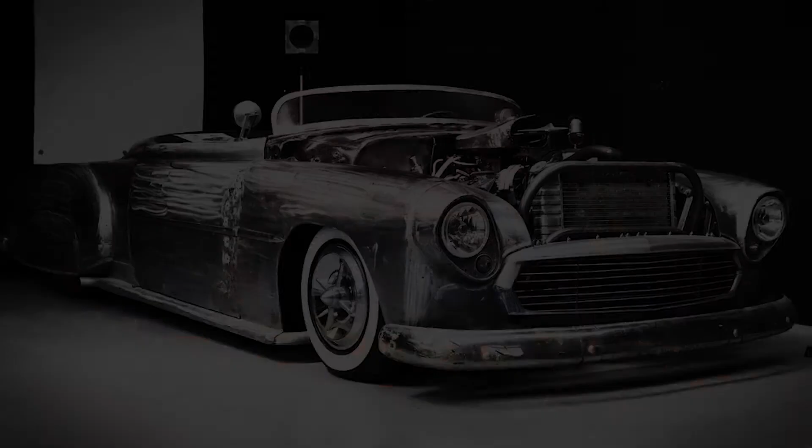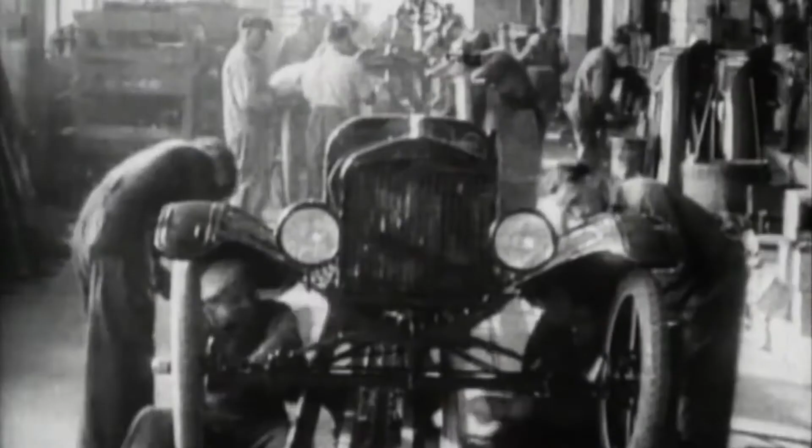Beyond just cool, the automobile has been a cornerstone of man's ingenuity, mythology, and fascination. It magically captures the ideals of freedom and inventiveness that drove us straight into and through a remarkable industrial age. The birth of assembly lines, mass manufacturing, and the Model T Ford put a blank canvas in the driveways of everyday America.

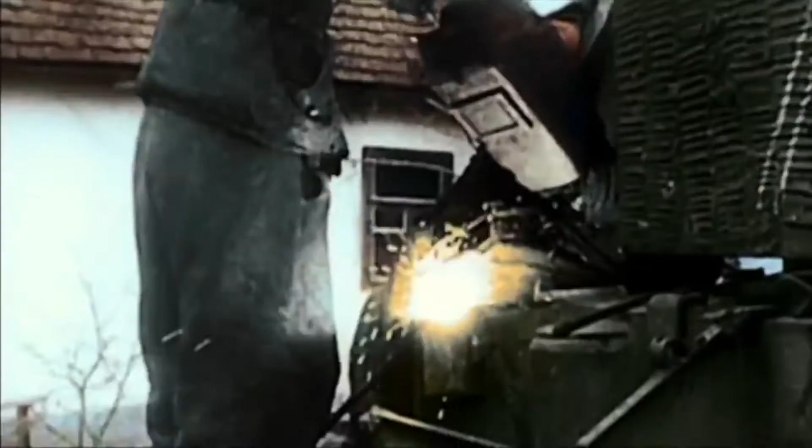At the end of World War II, a generation of Americans returned home with a taste of danger and excitement, along with newfound skills forged by operations of the industrial war machine. Everyday life seemed to run at half speed to these young men and women. They had the power to change this.

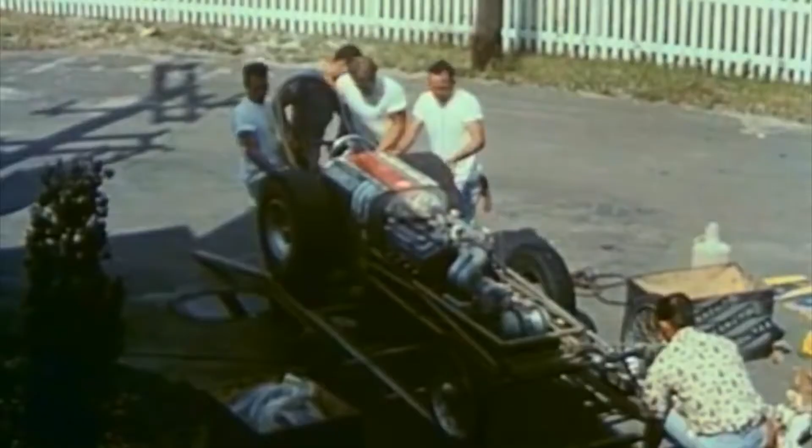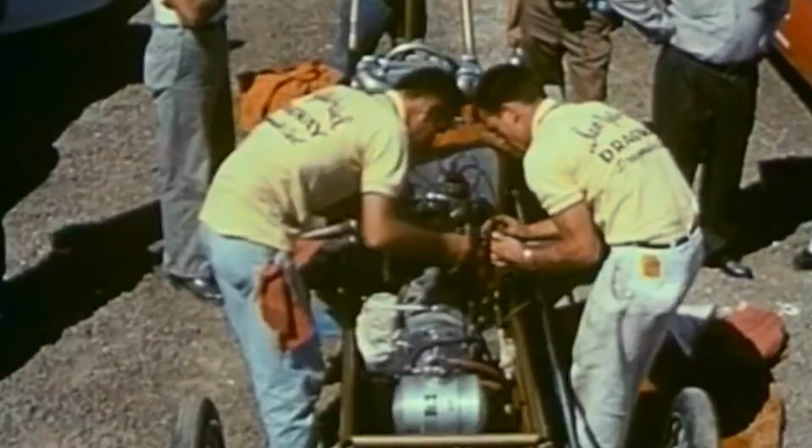Regular cars could be stripped down to the bare essentials. Using the mechanical skills learned during the war, motors could be hopped up to deliver high performance to these lighter frames. Soon, all across America, these backyard innovators were redesigning and modifying 30 years of mass-manufactured metal to produce lightweight, stripped-down, and incredibly fast cars. Each creation was an individual expression of form follows function and aggressive performance ideals.

Now let's move on and join the real speed boys of the desert. At El Mirage Dry Lake, those hopped-up cars may look like a familiar old jalopy, but their innards have been streamlined and given a shot of motorized adrenaline. A hot rod was born.

Hot rodders were the original vehicle hackers. They rescued the automobile from racing into a dull future of generic mass production anonymity by embracing deep customization and radical creativity. They drove what they wanted because they made what they wanted, and they drove fast. What started out as an unruly and dangerous form of racing on the dry lake beds of Southern California rapidly became a highly organized sport of drag racing.

Standard lap with top elapsed time on our Chrondek clocks, a 9.12. These weekend warriors worked to give their cars any advantage possible over the competition. It was never enough for the average teenage gearhead to simply be fastest. He needed to be coolest.

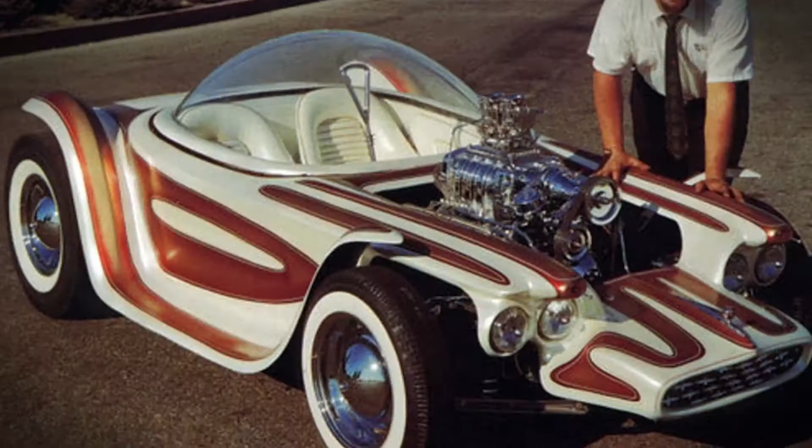Modifications like the chop top, big and little wheel and tire combos, and stripped down, smoothed out aerodynamic bodywork became de rigueur across America, as young people created their idea of what was cool, with easily accessible raw materials discarded in the junk piles of a rapidly industrialized nation. These mechanical innovators became leading lights in mainstream American motorsports.

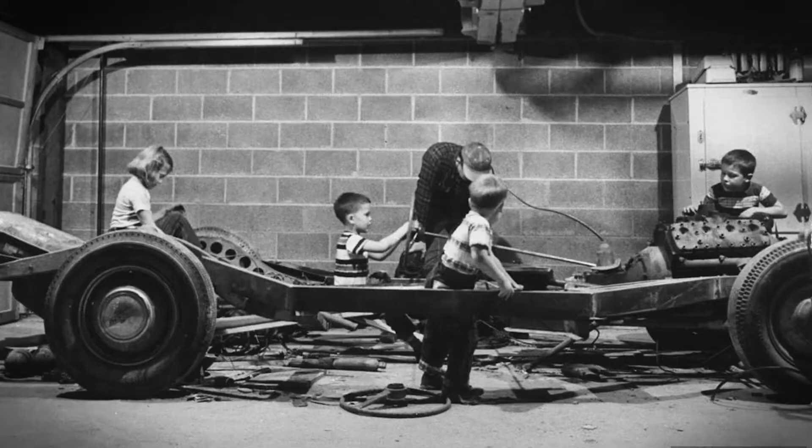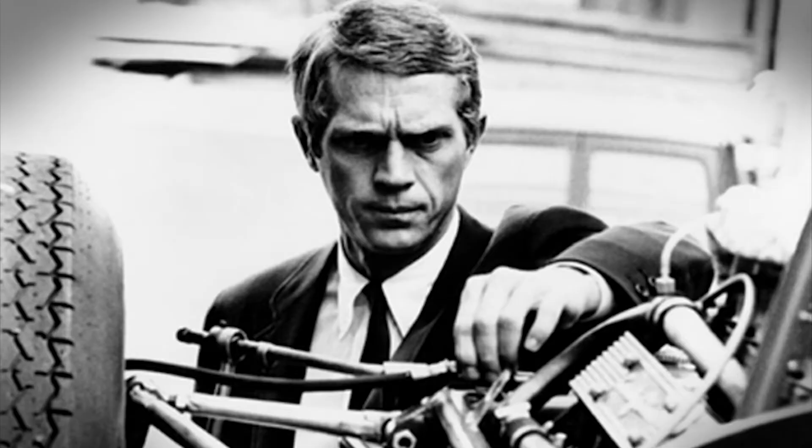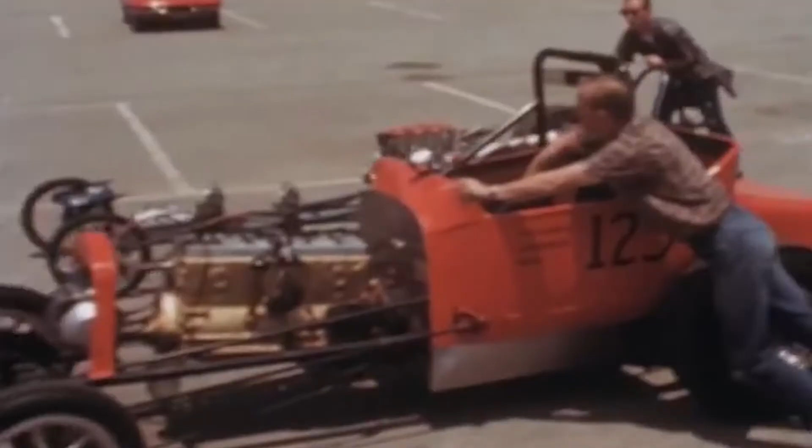It wasn't long before the major motor manufacturers were mining this ever-evolving youth culture for ideas and pedaling furiously to keep up with the visual language of the hot rod vernacular. 'Hey, you got a bitchin' car.' 'Yeah, I know.' Somewhere in a place where self-taught mechanics collided with beat culture, the coolest cars on the planet were created in the garages of innovators and makers, changing the car industry forever.

So I play that because it forms a major part of my history, but it also forms the basic ethos of the company that we formed in the US.

Now, I was a lad growing up in the 70s in Newcastle upon Tyne. Somehow I became fascinated with hot rods. I have no idea where it came from, but I spent that childhood playing with Hot Wheels cars rather than Matchbox cars. So imagine my surprise when 25 years later, I found myself as head of design for Hot Wheels.

In 2009, I was tasked with rebuilding the brand that had been around since 1968 and bring it to life in a way that we could make more than a toy brand from Hot Wheels. We wanted to build a lifestyle brand.

This image was the inspiration we came up with to turn what was just toy cars into a whole global automotive lifestyle brand. The guy I got on the phone to help me do that was a guy called Mouse McCoy. He was a Baja 1000 motorcycle champion, turned stuntman, turned movie director. He had a reputation for innovative filmmaking and action.

Between the two of us, we came up with a Hot Wheels for Real campaign. The campaign required us to build a lot of stuff very, very quickly, and it had to work, as you'll see.

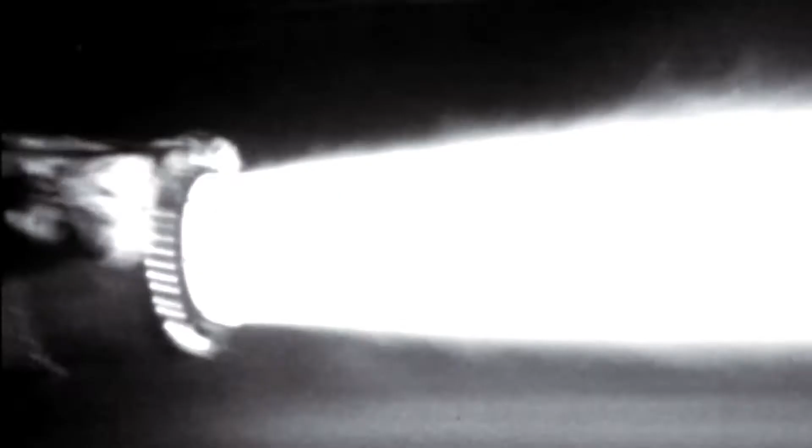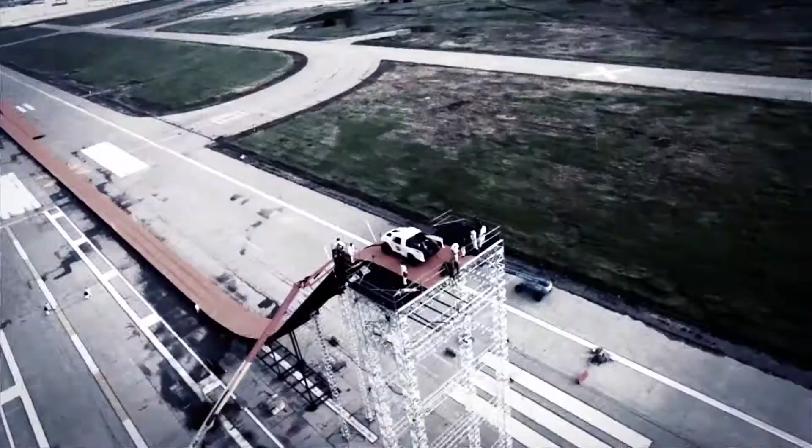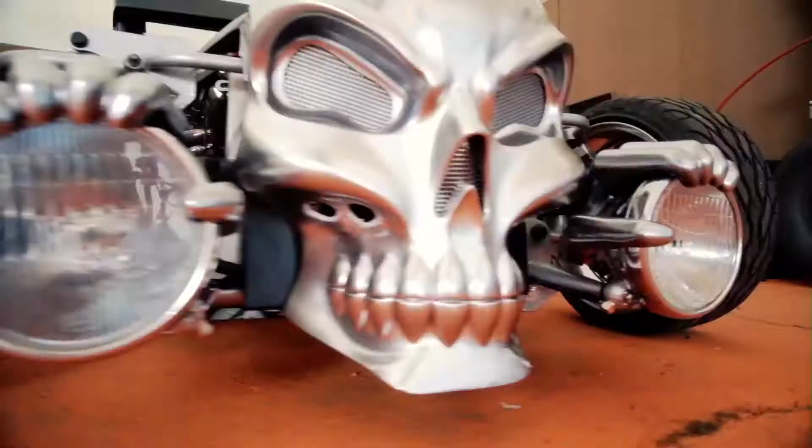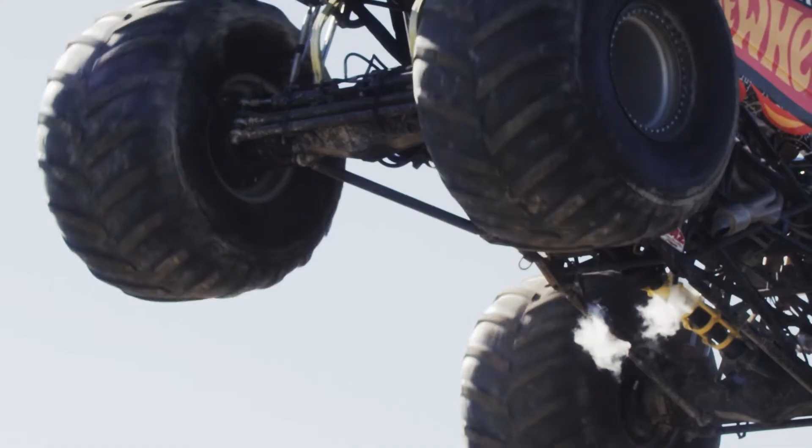For 43 years, this place has been secret. When you come to this facility, this is the cutting edge. We hold back nothing. The beginning of a whole new era. It's a kid's dream for all of us come to life. It's man's ingenuity on a grand scale. That's the orange track right there. The tires aren't gripping. I'm losing traction. Team Hot Wheels. In public for the first time ever. There have been stories and rumors in the test facility. It's time to set the record straight. I wouldn't believe what I was doing out here. Unconscious. Got it. Still no sign of movement in the cockpit. Guess there's nothing you can't do with a set of Hot Wheels.

So yes, I'm very proud of that, which is why I still show it. It's really just a good way to start a presentation. But the reality of it was, it formed a new idea in our heads. The Hot Wheels test facility was a mythical place where anything a child could imagine would come to life. And that was a very interesting idea to us.

Through 4 years of doing that, we realized we were using very old technology. We were really pushing the limits of how fast we could work with tried and trusted methodologies, and we were beginning to see the world of digital design and manufacturing changing.

A couple of years later, I decided to leave Mattel to look for something new, and Mouse was working on a project inspired by this that he called Autonomy. Autonomy was his next big movie, and his vision was the biggest car movie in the world that talks about the coming problem when driving is outlawed and autonomous cars take over.

If you're like me and Mouse, we like to drive cars. We know autonomous cars have a place, but we're fascinated by the notion of what happens to all those people who live to ride motorcycles, or perhaps live in the countryside, or perhaps they just love driving, and the conflict between autonomous vehicles and hot rods and sports cars and motorcycles leads to some pretty big problems.

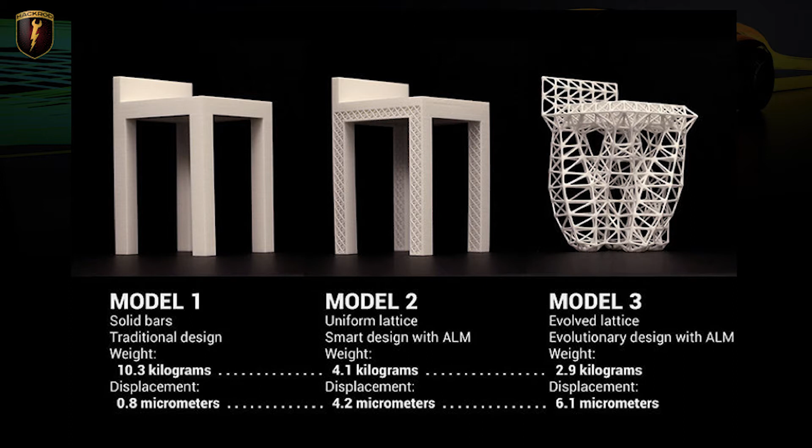When I saw not only the optimization that generative design can give you when you try to build a structure and optimize for lightweight or strength or whatever you want, I also saw a new aesthetic. This is going back about 3.5 years ago now.

Mouse and I looked at each other and went, dude, can you imagine what it would look like if we built a car chassis like that? So suddenly, our quest for movie research took on a more immediate world, and we found ourselves slipping into design and manufacturing, researching the reality of where that world's going to go.

Now, if you're making a movie, you've got to have a star. So Mouse and I designed the car that we wanted. We were like, if we're going to do this, let's design the car that we know we can't have. So I'd like to introduce La Bandita.

It's a car that wears its heritage on its sleeve, but is going to be built with the very latest technologies. We were inspired by vintage Porsches and vintage Ferraris from the 50s, where they're amongst the most beautiful cars ever made, and I don't think anybody would dispute that.

But really, when you look at them, they're just a metal upside-down bathtub with a big engine and some crude suspension. They're very simple, made for one thing: driving fast and dealing with the harsh realities of a road race like La Carrera Panamericana or Mille Miglia.

So we set out our stall and started the design. Using tools like Fusion, Autodesk's core new digital design platform, we realized that we could very quickly go from a rough sketch to a fairly complex body form.

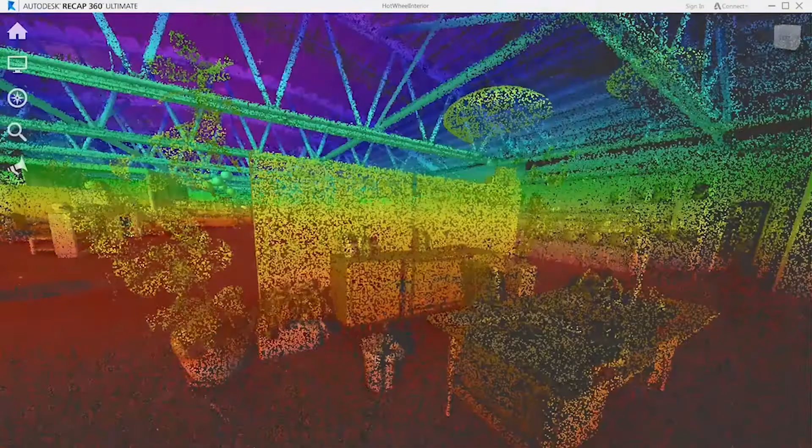So we looked at the world of reality capture, and we began with a chassis we already had that we knew was a good chassis. For the Hot Wheels project, we developed a lightweight sports car chassis with some off-road engineers, and these guys we referred to as the wizards of chromoly.

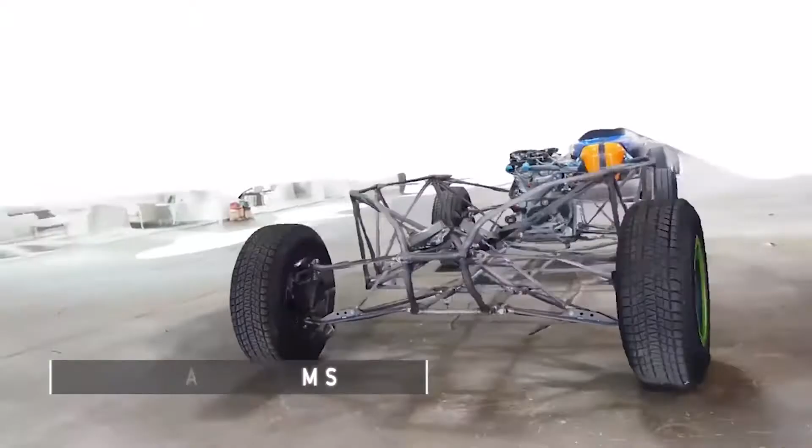They were the guys who could just chalk out a chassis design on the floor and fabricate it. And we knew this worked because some of the best drivers in the world had driven this car up a mountain and came back saying, that was the most fun I've had in years.

So we knew this structure was good enough, so we scanned the structure, captured all the hard points for suspension and engine mounts. We sensored that car up, we put Mouse in the driving seat - there was no slouch behind the wheel.

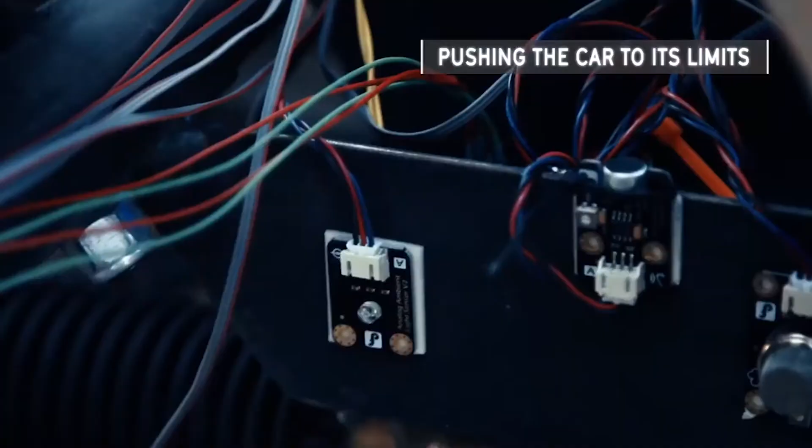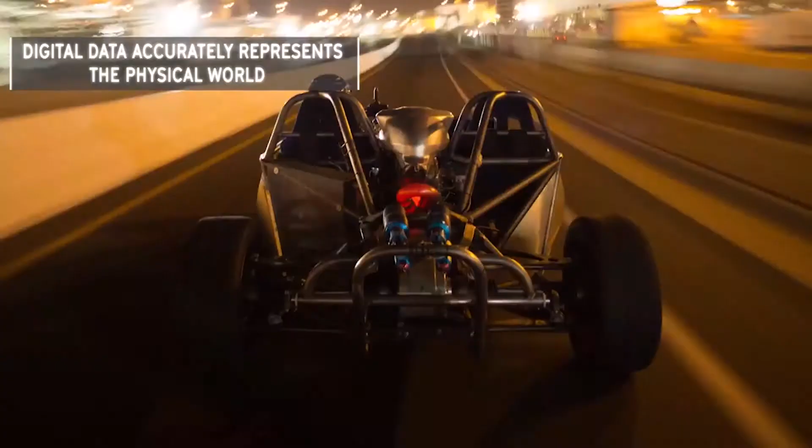He took it out into the desert and absolutely thrashed it. Now, we weren't ever going to drive this car like this once we finished it. We're not designing an off-road car, but we figured that if we can make it survive the rigors of driving in the desert like this and capture all the data with a simple loom, we partnered with National Instruments and built a simple sensing loom for all of the key stress points in the chassis. We knew that we would have captured, not only with the reality capture side of things, the geometry that makes it work, but also all of the forces that the car went through when it was being absolutely thrashed to the limit.

We had some fun closing some streets down in Long Beach. It's the benefit of having a movie director as a business partner - you get to play with all sorts of big movie toys and feel like you're in Hollywood all the time.

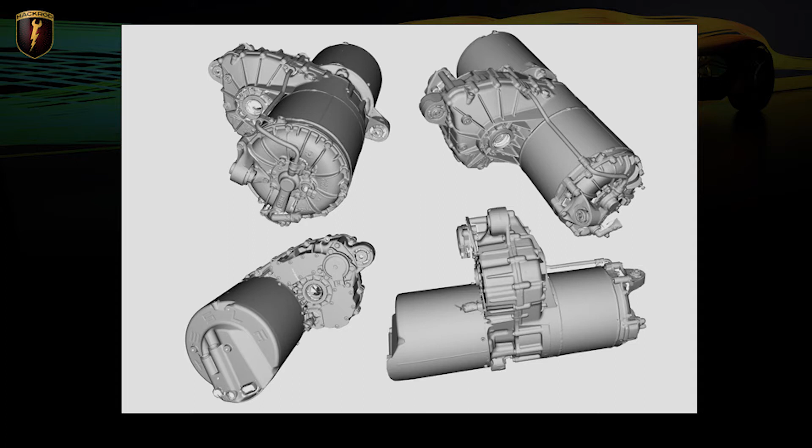We also scanned the mechanical components. We decided actually that we were going to make this car fit for the 21st century, and so we looked to Tesla for power. We decided that elegant 50s-looking sports car was actually going to be powered by Tesla. We didn't go to Tesla knocking on the door - we decided to put the hack in Hackrod into play, and we went to the junkyards of California, where, believe it or not, there are a lot of very cheap Teslas.

Now, Tesla is a really fantastic car, but it's still driven by humans. And when you put a very fast car in the hands of humans, you tend to find a lot of them in the junkyards. So we pulled the motor out of a Tesla, and we scanned that as the major mechanical component, and we fed all of this information into Dreamcatcher, and started on the process of generative design.

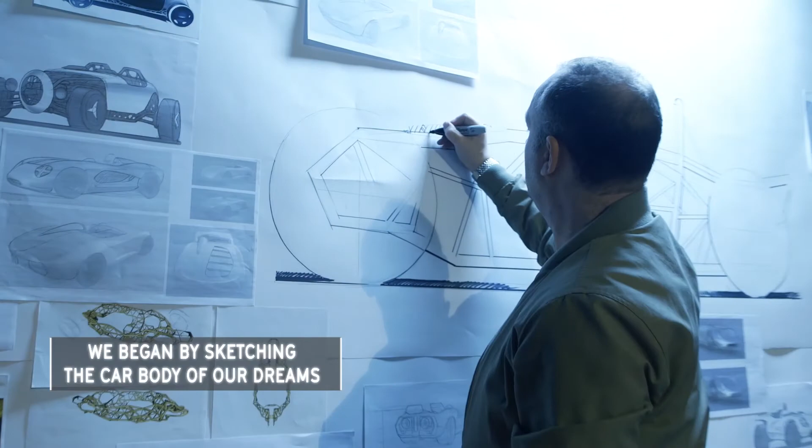Now, the way it works is this. You build a digital model, and you put in your mounting points that we'd scanned and captured from the original chassis. You put in your mechanical needs, your mechanical components. You put in voids where you don't want the chassis to grow. And what's left is the area of the car within the outer shell that you want to build your structure.

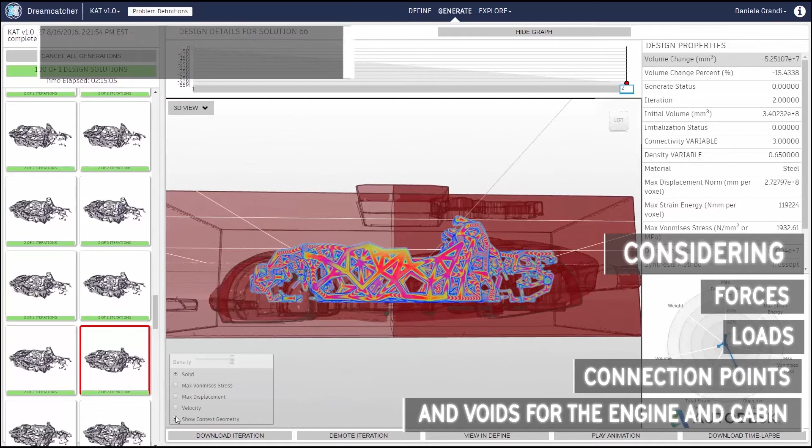The wonderful thing about Dreamcatcher is that it would give us hundreds of iterations - not just one solution, but you could flick through and move some parameters until you were happy with the way the car looked. We also pulled it into some analysis software where we could check for rigidity and any problems and do a little bit of digital proof. We also put some VR goggles on and started working on the car.

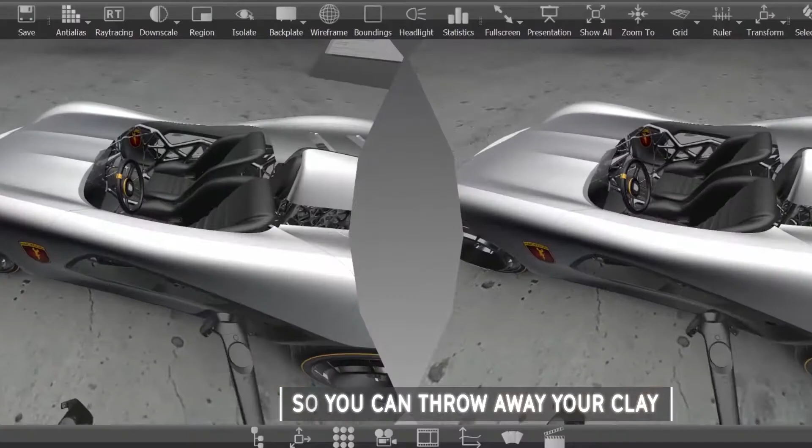This is obviously just a mock-up, but the next bit, we actually started looking at this car full size in VR. I actually fitted the engine to the transmission to the chassis 3 months before we started welding any steel. And 3 months later, once we finished the chassis and I put the motor in, it fit perfectly. So we were genuinely using VR to make key design decisions well upstream of where normally you would ever have the chance to view it in reality.

Now, this is where it gets interesting, because around this time, we realized there was no way we were going to 3D print a generative chassis full size for a car. We talked to all the right people, but it just appeared there was no way we were going to get there in time, and this was for Autodesk University last year.

So we took a step back, and we said, well, we're missing a point here, right? We're using all of this fantastic technology and all of this new world of cloud processing and digital power, but most people today, if they got this far, wouldn't be pressing print on like $1 million parts. Most people would probably just want to weld up a chassis.

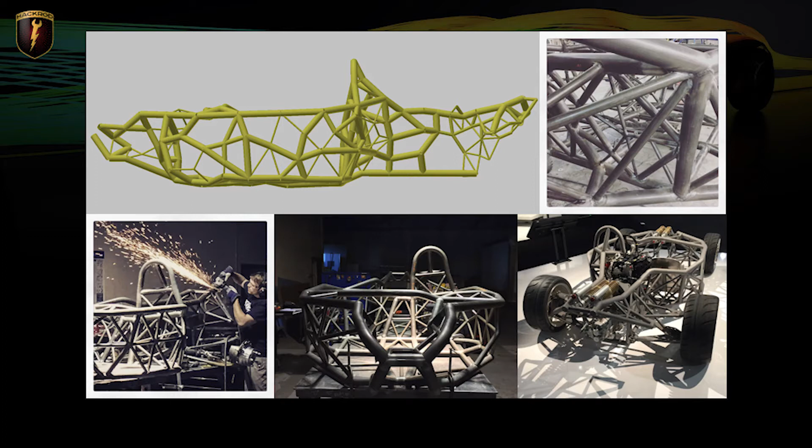So we ran another simulation with Dreamcatcher, and we specified the material as chromoly tubing. Chromoly tubing is what most off-road teams and NASCAR teams use to build their chassis. It's incredibly strong, it flexes well, and it's been the staple of American race car design for a long time. Now, we specified thin wall tubing, and we let Dreamcatcher do its job, and the model came back 30% lighter.

We had to figure out how you would actually fabricate a complex structure like that, and we partnered with some other companies in California. There's a company in Orange, California that has pioneered CNC tube bending, laser cutting, notching and serial numbers. So we ended up with a big jigsaw puzzle of tubing, literally 320 tubes laid out on the workshop floor, but they all clicked together like a kit.

So a week later, we'd fabricated a cutting-edge, generatively designed chromoly race car chassis, and when we cut it off the frame table and put it on the scales, sure enough, it was 30% lighter than the car we started with.

Now the next stage with this car, and this is where we're right now, is we've got to do some serious testing to prove out that it is as strong as the last car. But everybody who's looked at it, all the engineers, have said that not only does it theoretically look stiff enough and strong enough, but it's also a lot more rigid than the chassis we started with, because of the way the forces are now spread throughout the frame.

We think we've got a very, very rigid, 30% lighter chassis that also looks a hell of a lot better, because we got to play with the aesthetics. And if you notice on these photographs, it's completely asymmetric. At first we were like, why is it asymmetric?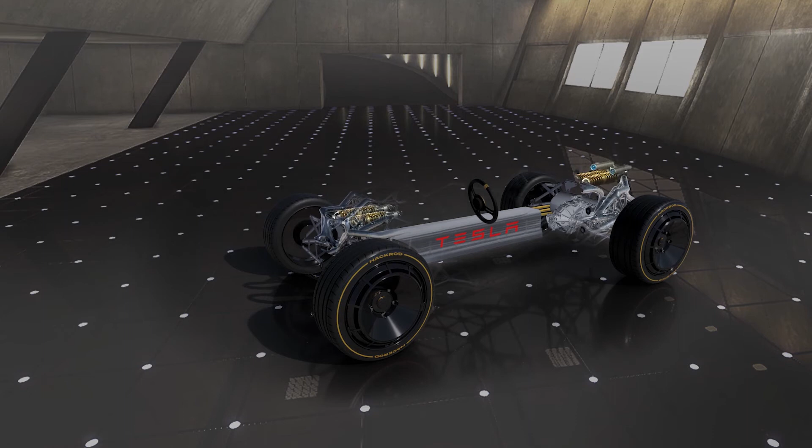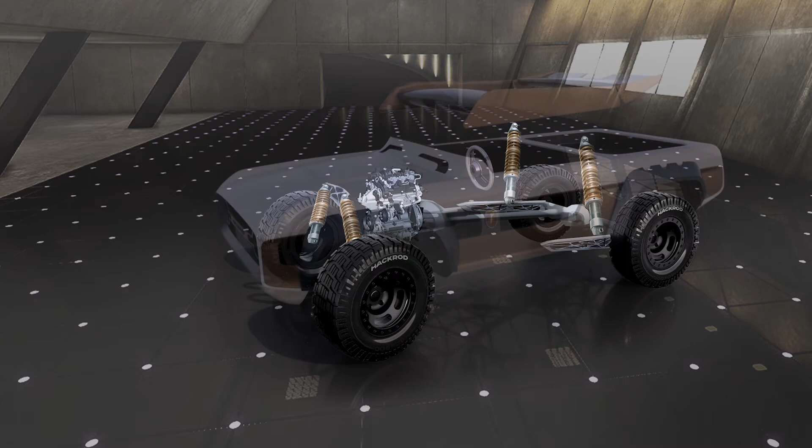The goal of the project is this: build a platform so you can drag and drop your components, choose your suspension, choose your drivetrain, choose your outer shell, and then generatively grow a chassis. And then if you decide you want to change your design, start with a different set of mechanical components, a different outer shell, and have artificial intelligence and generative design grow you a new structure that'll tie it all together. The missing point is we need a printer big enough to print a chassis, because a lot of these structures really are only suitable for additive manufacturing.

So we called Slade up and asked him to come and have a chat with us, and after we showed him our vision, he explained to us that he was getting frustrated with all the ideas in his head, that he couldn't move fast enough, and he decided to join Hackrod as our new CTO. I'm going to let Slade do some talking now, because he's a lot smarter than me, and I want you to hear from his own mouth his vision of the future.

I'm an expert in advanced manufacturing and materials. I've spent my career inventing materials and manufacturing processes for some of the most high-speed products on this planet and off of it. I was recruited by Lockheed Martin Aeronautics to work in the Skunk Works. I worked in a group that was specifically focused on advanced manufacturing concepts. We were called Project Lightspeed.

And we were going to change the paradigms of manufacturing. My project to enter that group was to study and determine how we were going to 3D print the next jet fighter with carbon nanotubes.

We're looking at a manufacturing future that's going to be very different. In the aerospace world, you have access to a lot of expensive but sophisticated and capable tools. Those tools are becoming more accessible. Those software packages, those imaging techniques, the analysis, even the manufacturing itself is becoming more accessible to other industries, to individuals even. And by taking those tools and offering them to more people, what we're doing is we're democratizing manufacturing.

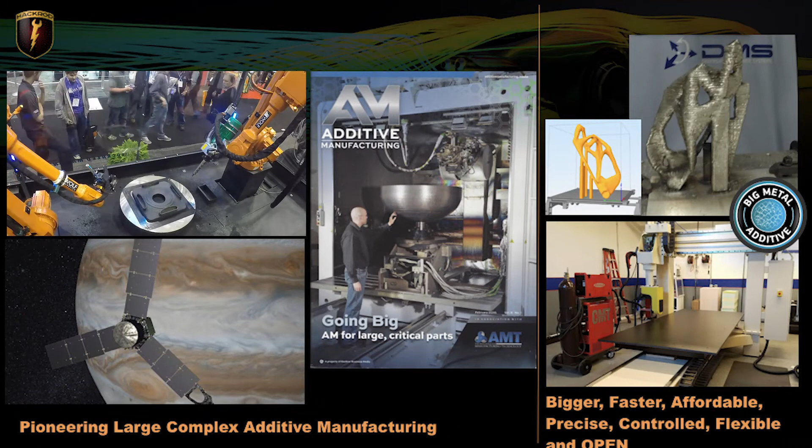Slade's history with Lockheed Martin started up there on the left, where he figured out how to print satellites around conventional propellant tanks. He actually pioneered the additive manufacturing at Lockheed Martin needed to print the Juno space probe, which is the probe that currently is orbiting Jupiter.

And then just before he left, he'd moved into an entirely different scale and had 3D printed, I think it was a 48-inch propellant tank, which was certified for use on the Orion space program. So the guy came to us knowing a thing or two about large-scale metal additive.

And he began to experiment with what he calls big metal additive. That's his DIY home project. And his goal was to produce a machine that could handle large-scale additive metal manufacturing, bring the cost down, improve the stability of the printed part, the dimensional stability, and also run a lot faster.

Now, the machine that he's developing - most large-scale print machines will lay down about half a pound to one pound per hour. Slade reckons he's going to be more in the 3 to 5 pounds per hour parameter.

The object you see at the top right is a generatively designed propellant tank bracket for use - it's a military marine application, and this is the first project we've run on the prototype machine, and it ran perfectly. And so we're now in the process of building a 20-foot print bed to print large-scale components such as car chassis. And I've got a little bit of footage to show you of this machine in action.

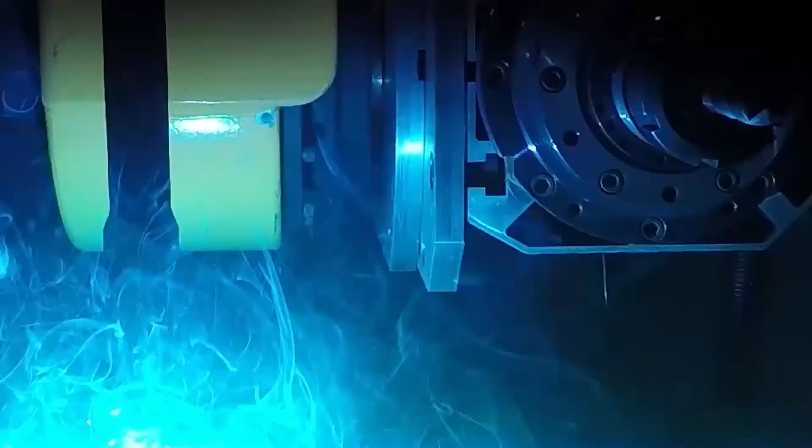And as you can see, we started with a generative part and then sliced it. It's actually a hybrid machine, and one of the things that we're finding is the way to maintain tolerance when you're using deposition printing is to have a second head on the machine, which is a mill.

And so we print a couple of layers and deck it, and print a couple of layers and deck it. And through that process, you get to maintain really good stability in a large metal part. And let the robot finish what it's doing.

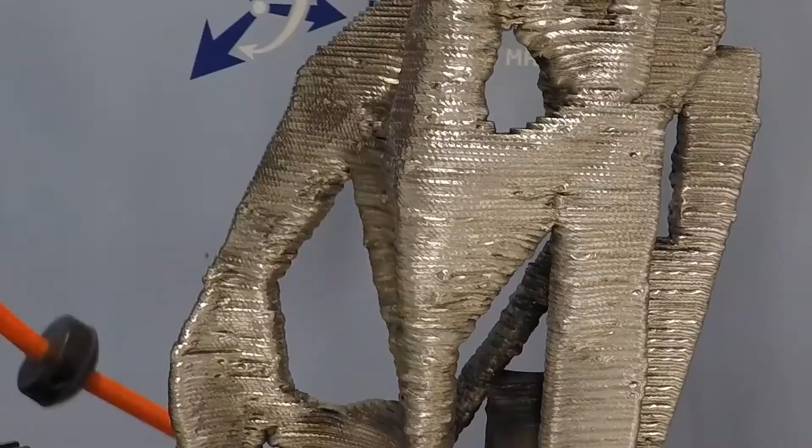Now, Slade was very happy with this bracket. He felt it met all the parameters he needed. And the really cool thing, what you don't see here, is the cutting head can then come and trim the support off. It can, before it does that, do some finish work. If there's any surfaces that must be milled to exact tolerances, that can be done on the machine.

The exciting thing is it now has a rewind button. So if the print screws up, which for years and years has been one of the big problems - anybody who's ever run a 3D printer knows that if your job goes bad, it's in the trash to start again. Well, we now have a rewind button to say, hang on a minute, that's not right. Trim it back to where we go. Let's correct the file, let's correct the machine, and keep going.

And the next phase for us really is to move on. Hopefully early new year, we should have a big bed ready and we can start printing our car chassis. Now, this is the final goal. We're hoping within the next 12 months this thing will be a reality, that we will have an aluminium 3D printed, generatively designed car chassis.

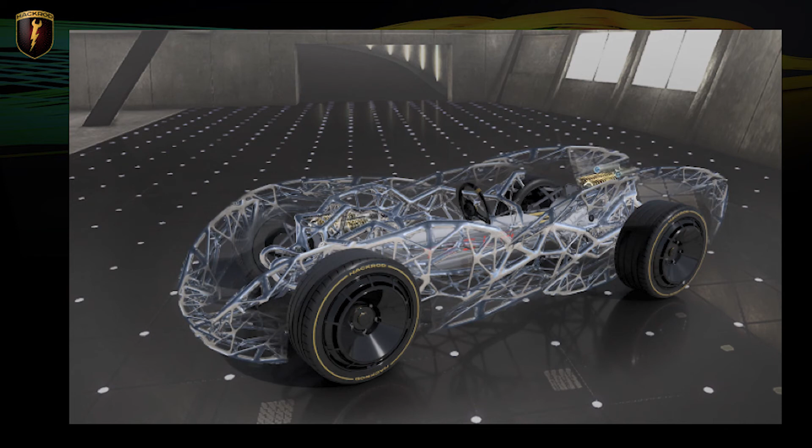That has been done using techniques that we hope to standardize and truly democratize the idea of building your own vehicle. The idea that you could decide on the components you want, the layout you want, drag from a template the performance characteristics of the chassis, let generative design grow you a structure, and press print on a big machine so you can, in effect, design and build your own car.

That, for me, almost bang on half an hour, is the end of my story.